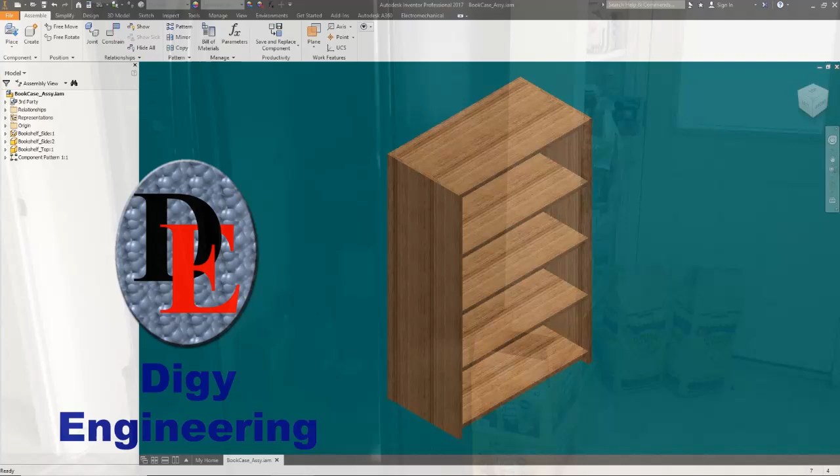Some of you may have already viewed my bookcase project video uploaded June of 2023. This shelf is essentially going to be the same thing, but just a different size. In that previous video, I demonstrated using an Excel spreadsheet to control the design of an assembly, and what I'm going to do is grab those files and use them to make a new shelf.

I've already created my new working folder and have it open here right next to the original shelf project. Now I need to decide which of the files need to be copied over, and for that, I need to view the thumbnails. A Windows hint. Hotkeys for changing the views of a folder are holding the Control and Shift key down along with the number keys 1 through 8. Pressing keys Control Shift 2 changes the view to thumbnails so I can see which file is which and then select the ones needed for this project.

Files selected are the project file, Excel spreadsheet, shelf, side, toe kick, and top. I also brought over the 2 cut sheets. And now, let's get started with the design.

Now that I have all of the files, it is time to rename them for the new project. Renaming the files will break all of the links in Inventor, but you'll see that is relatively simple to fix. We also need to temporarily rename the original folder so that Inventor cannot find it to enable linking to the new files.

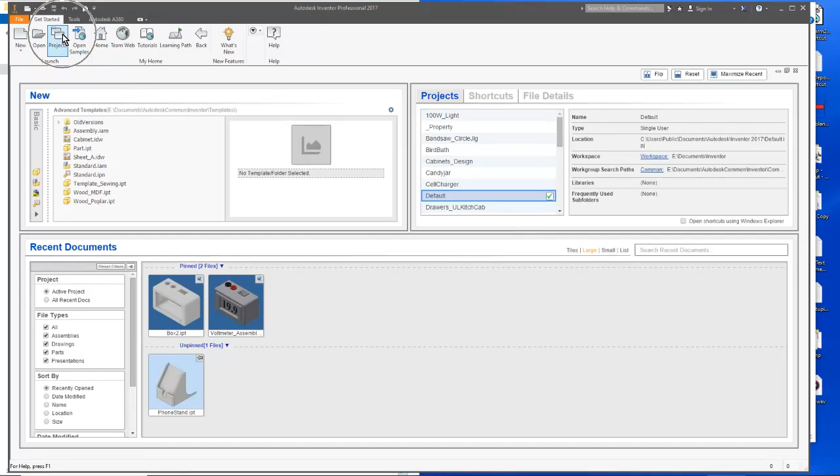Now that the files are renamed, let's get it open in Inventor. I already had Inventor open, so now I need to point to the new project file. At the top left on the icon bar, click on Projects. Then browse at the bottom center of the Projects dialog box. Now browsing to my new working folder and then double click on the new project.

When fixing links, we always want to start at the lowest levels, which in this case are the parts files. It does not matter what order they are done in unless some of the parts are linked to others, and I won't know that until I open a file. Here you can see when I open the first file, it is trying to find the original spreadsheet for the bookcase project. To fix it, all I have to do is select the new spreadsheet. And now that that one is relinked, I will do the same thing for the rest of the part files.

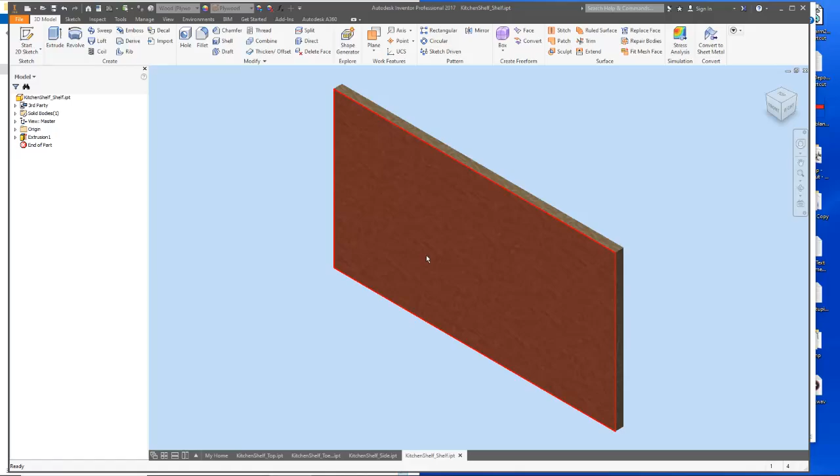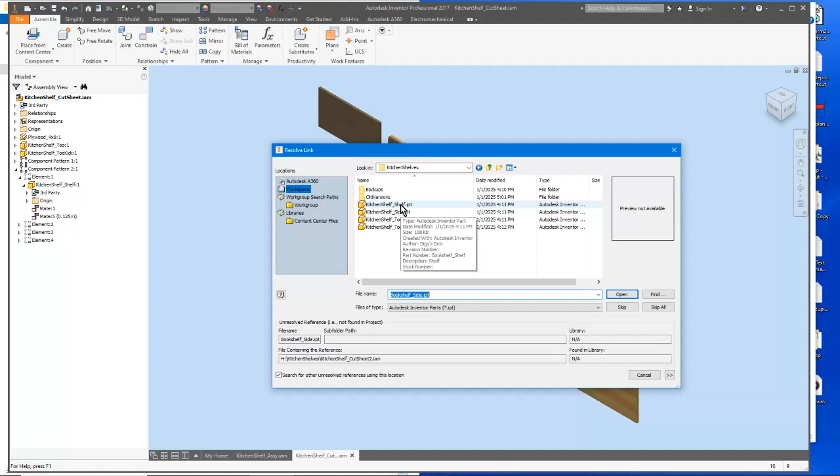Now that the parts files are relinked, it is time to attempt opening the assembly and validate everything is okay. This is a simple process just like the parts, and I just have to point to all the new files. And when this is done, I will relink the 2 cut sheets and then go back and rename the original bookcase folder. And now that I have a workable model, it is time to update the design for its new purpose in the kitchen.

Looking around at what I want to put on the shelves, I decided on a preliminary height of 58 inches, but the available space limits it to only 9 inches deep, and that presents a tip-over hazard. I have a solution for that I will reveal later in the design. After measuring a number of items that I might be keeping on this shelf, it looks like a shelf spacing of 9.5 or 10 inches is needed. The height and shelf spacing will be finalized as I build the model.

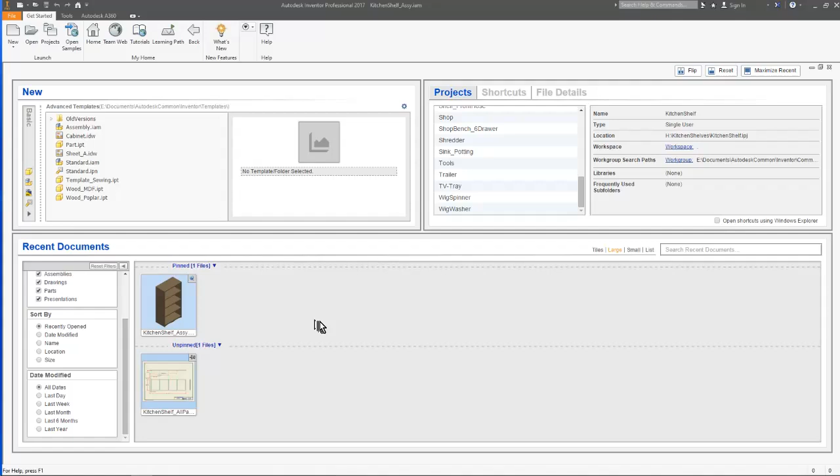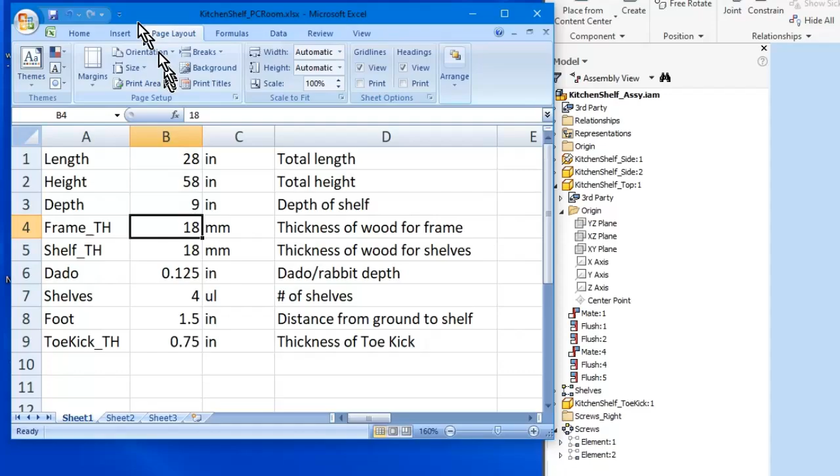Now opening the new bookshelf model and then shrinking the window so that we can see both the bookshelf model and the spreadsheet controlling all the dimensions right next to each other. Now we're going to witness the power available when linking to a spreadsheet for the design of a model. On the left side in the spreadsheet, I'm going to change the dimensions to what I want the final dimensions for my shelf. Saving the Excel file and then back to Inventor and wait for it to recognize something that's changed and light up the update button.

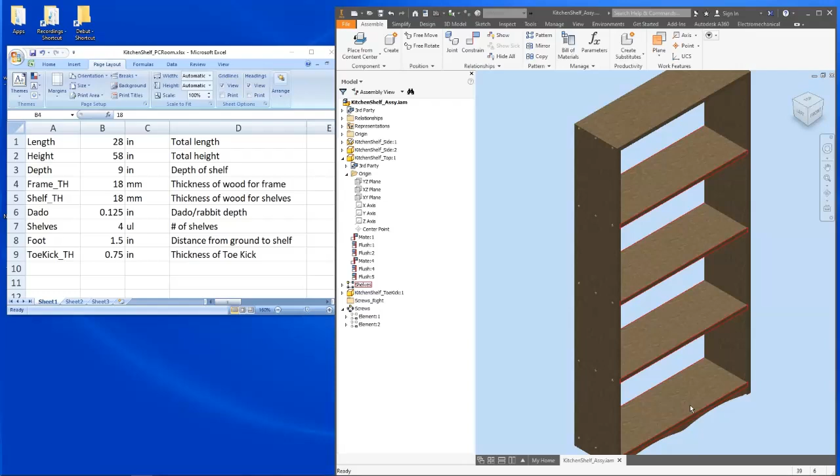When the update icon lights up, I click it and all of the parts in the bookcase magically change their size to the new parameters. Checking the dimension between the shelves, I decide to play with how many shelves are in the design to see the optimum spacing. I end up deciding on 5 shelves for the optimum spacing for the items I want to put on this shelf.

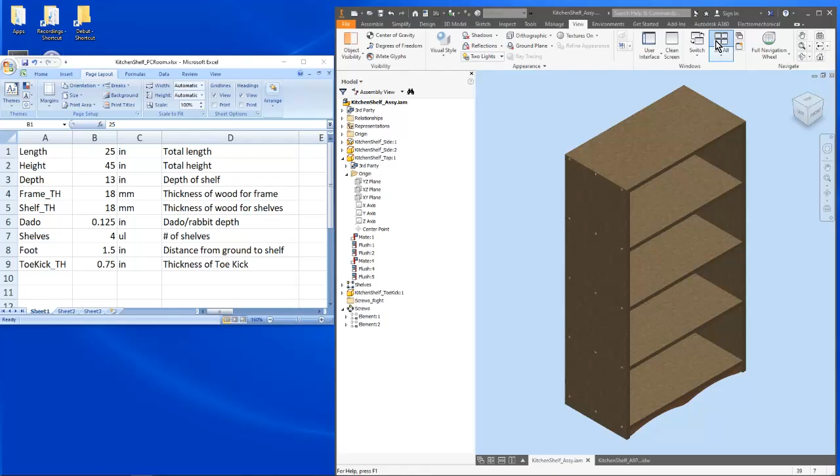Now, to further illustrate some of the magic in this method, let me split the screen so now we can see the shelf, one of the prints for one of the sides of the shelf, and the Excel spreadsheet. And here you can see the shelf assembly is not the design I actually want. So now what I'm going to do is go back into the spreadsheet and change the dimensions back to the design I ended up wanting to build, and then you will see that everything updates itself. Magic.

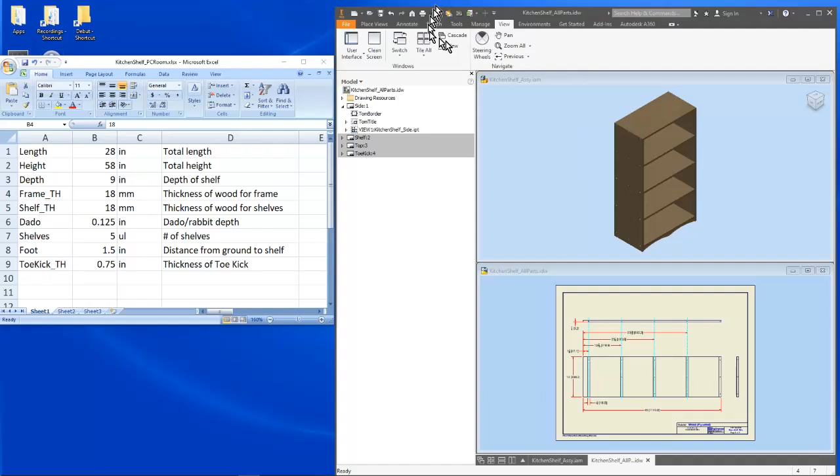I did not have to create any new models or create any new assemblies. All I did is copy files from one folder to another and then ran an update. And now all I have to do is clean up a few of the prints, and I think I'm ready to start making some sawdust.

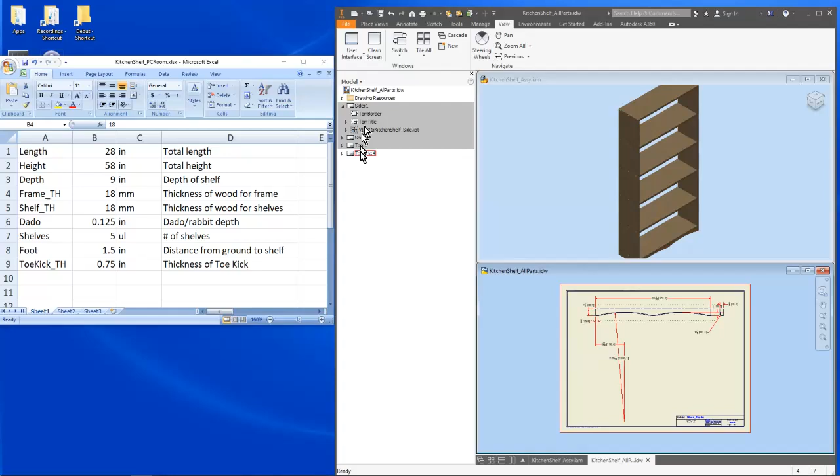I decided that this will be the end of part 1. Come on back for part 2 when I start making some sawdust along with screwing and gluing.